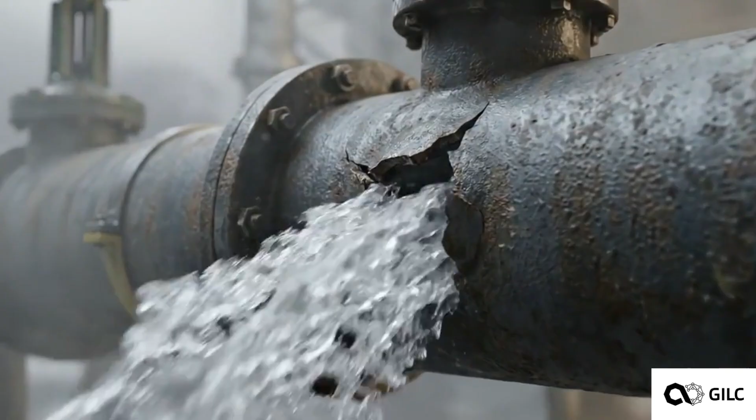We are frequently told the energy transition requires building massive new power plants. But look at the grid we already operate. The global civil infrastructure network is bleeding kinetic energy.

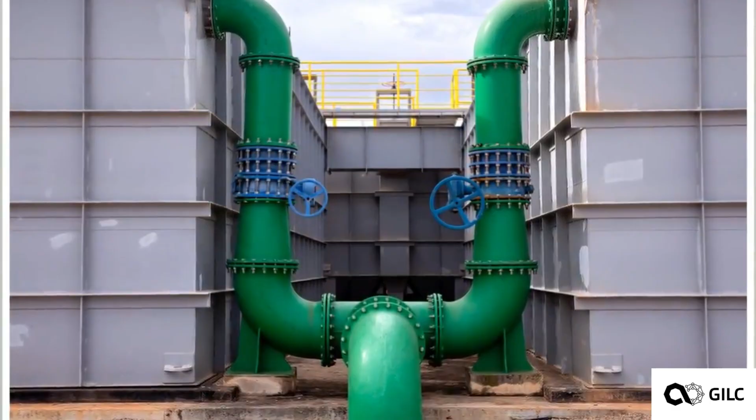Consider municipal water mains. Every day, millions of gallons are pumped through these networks. To prevent pipe bursts at your faucet, heavy industrial valves artificially drop the water pressure. That pressure drop is uncaptured mechanical energy.

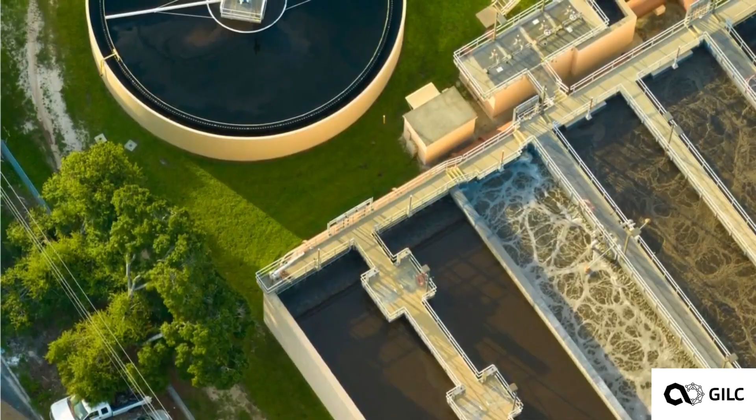The same mechanical waste happens in wastewater treatment. These massive facilities run continuous, unoptimized aeration cycles 24 hours a day, burning electricity to keep fluid in motion without recovering any of that momentum.

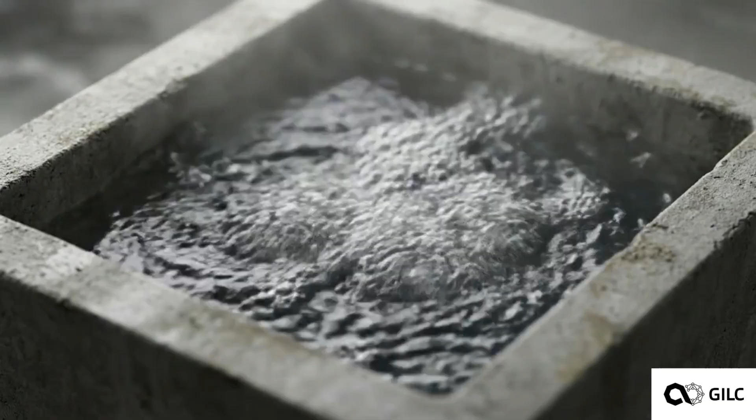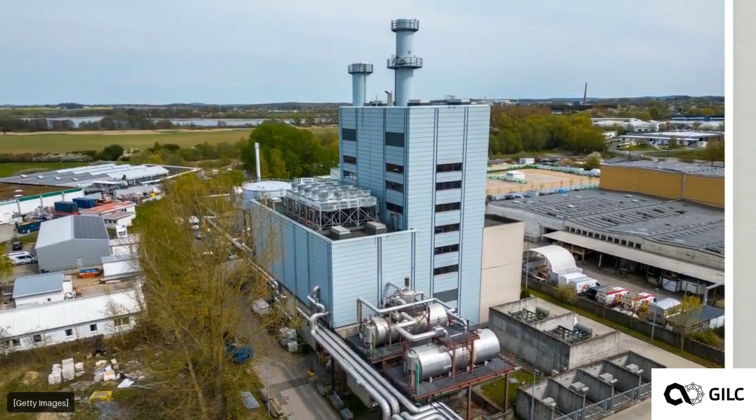District heating networks operate on similar inefficiencies. Main circulation pumps force hot water across entire cities, yet their mechanical loads remain untracked and unoptimized. Municipal utilities treat these systems as static energy consumers, but the physics dictate otherwise. These networks are active kinetic reserves.

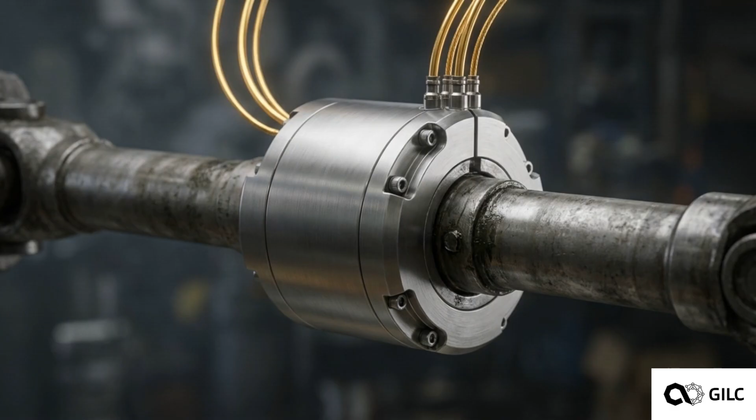Rather than constructing a new utility from scratch, we can deploy an energy recovery infrastructure layer, a physical network that intercepts rotating machinery and captures the wasted mechanical force directly at the source. The next phase of public infrastructure relies on capturing this invisible waste. It converts constant operating liabilities directly into generating assets.

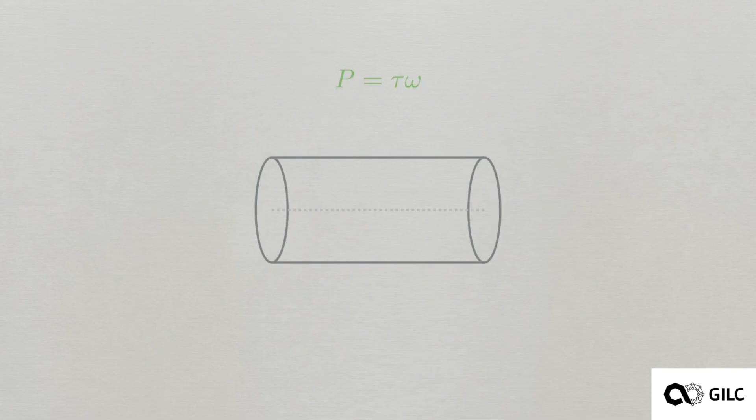Energy recovery follows a strict equation: power equals torque times angular velocity. To capture this, rotational force is channeled into a radial flux permanent magnet generator. Inside, spinning neodymium magnets convert torque into raw alternating current.

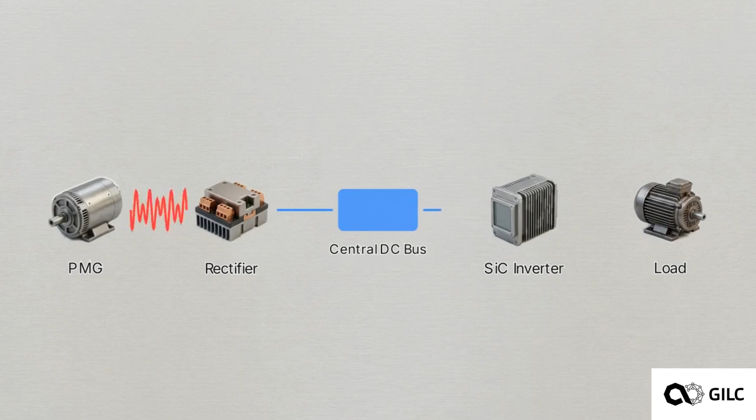But you cannot feed raw, unregulated alternating current back into an industrial facility. This strict power electronic stack conditions the energy. Raw AC exits the generator, enters a rectifier, and feeds a central DC bus. From there, it passes through a silicon carbide inverter, minimizing thermal losses and maintaining system efficiency above 95%.

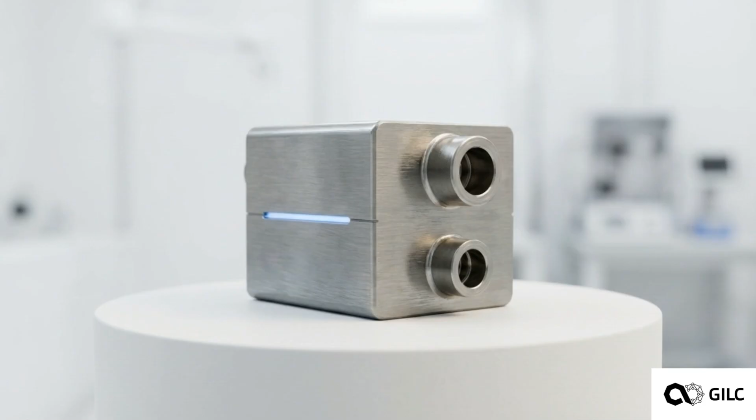Proving these physics in an isolated environment is straightforward. Deploying the technology across a global grid requires mass production. Bespoke, custom-built generators cannot meet that scale.

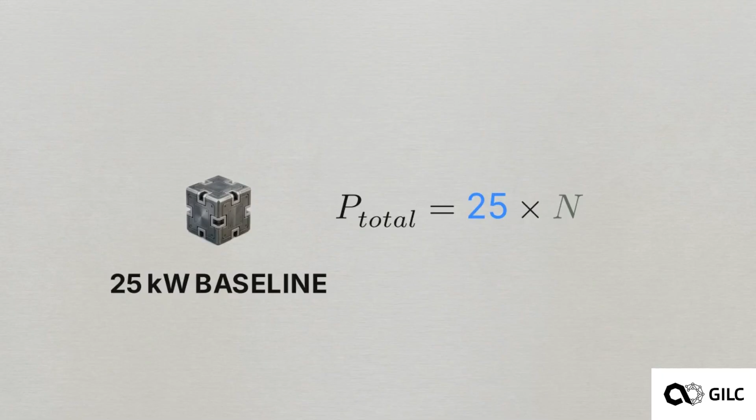Hardware must be standardized. This 25 kilowatt flux block is the interchangeable baseline unit. Every deployment follows a rigid rule: total power equals 25 times N. These modules stack, scaling from a 25 kilowatt micronode to a 2 megawatt industrial array.

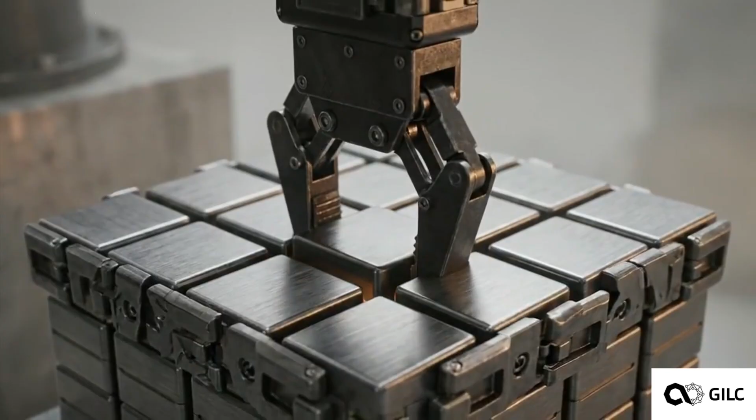Using a single standardized block eliminates custom engineering on site. It collapses inventory complexity and removes friction from the supply chain. By locking the physics of energy conversion into plug-and-play modules, the recovery infrastructure transitions into scalable industrial hardware.

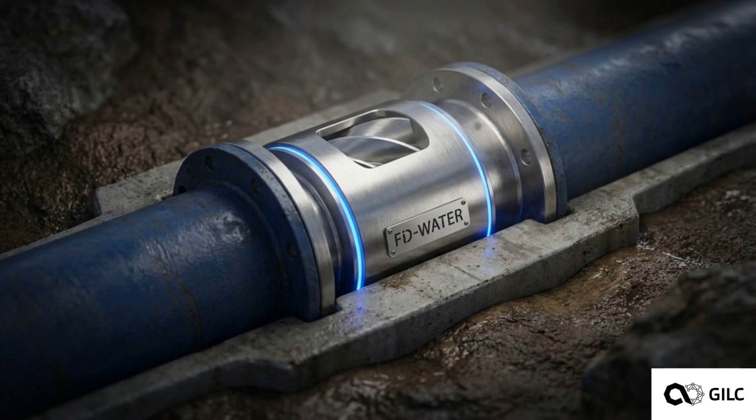This modular framework is currently deployed in Sofia, Bulgaria. The city serves as phase 1 of a national program, acting as the primary proving ground for civil infrastructure integration. The initial deployment installs FD water nodes directly into the municipal water mains.

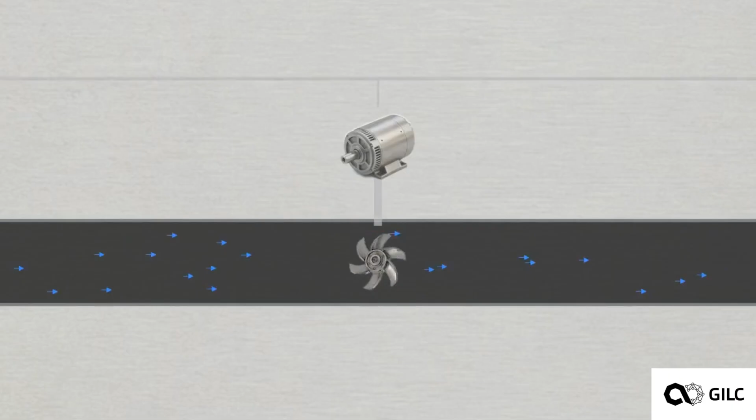This visual demonstrates the fluid dynamics of an inline turbine. As standard pressure drops of 1 to 5 bar pass through the system, the node captures the kinetic flow. Each integrated cluster is engineered to generate 100 to 500 kilowatts of continuous power.

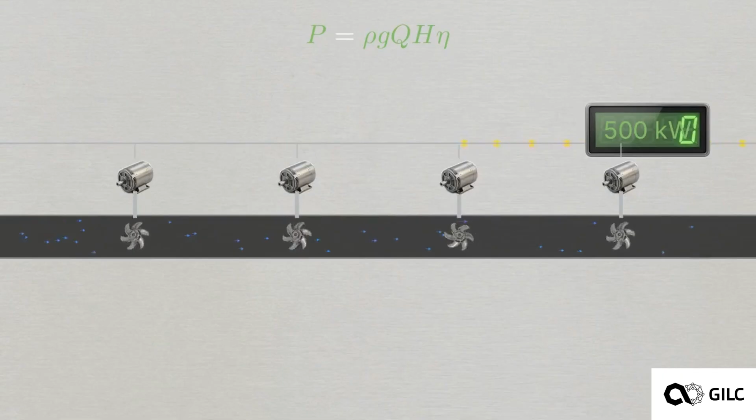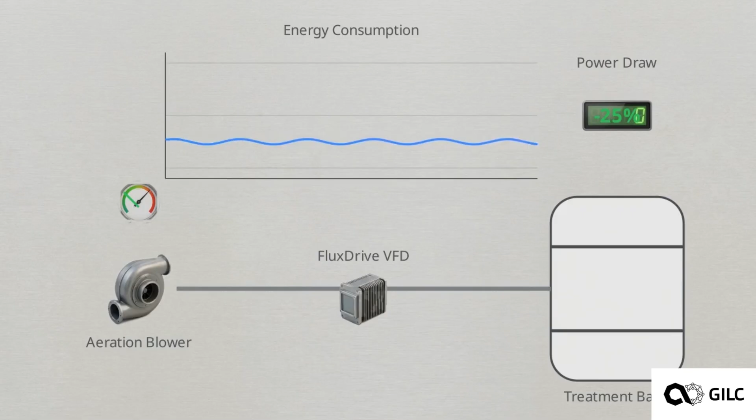The second deployment site is the Kubratovo Wastewater Treatment Plant. By retrofitting the aeration blowers and sludge pumps with variable frequency drives and advanced controls, the facility's overall energy consumption drops by 25%. The third site connects to Toplofikacia Sofia, the local district heating authority.

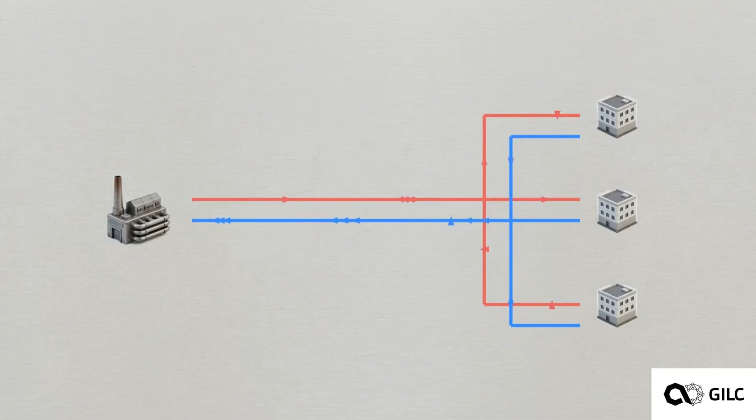Upgrading the main circulation pumps and local substations reduces the network's electrical load by 10 to 20%. For any municipal operator, the primary barrier to these upgrades is facility downtime. Shutting off a city's water supply to install a generator is not an option.

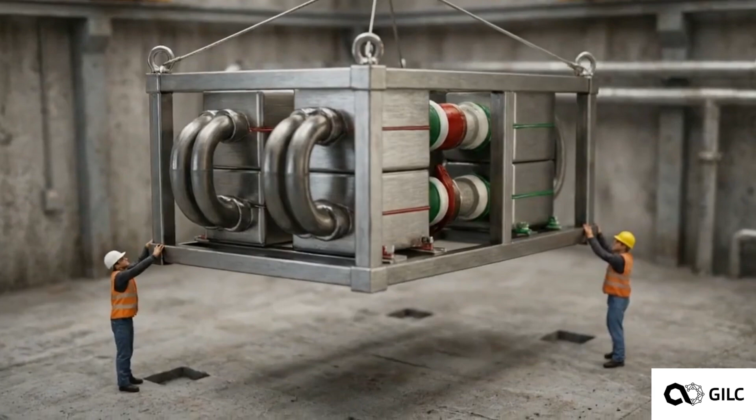Because the hardware arrives on standardized, pre-assembled skids, mechanical mounting and electrical integration are highly predictable. Installation requires under 48 hours of facility downtime. You do not need to halt a living city to upgrade its infrastructure. You simply plug into the existing flow.

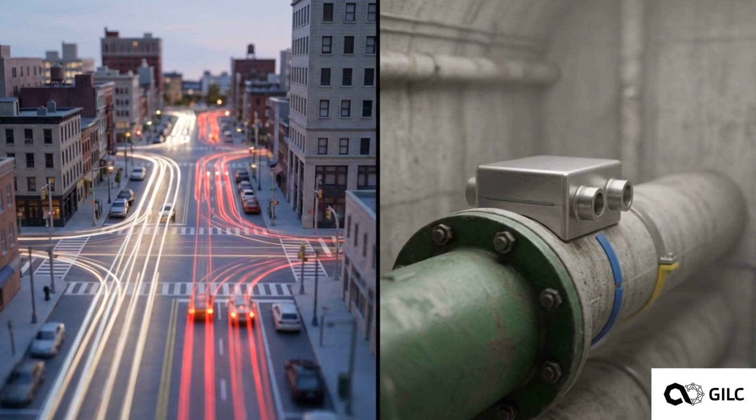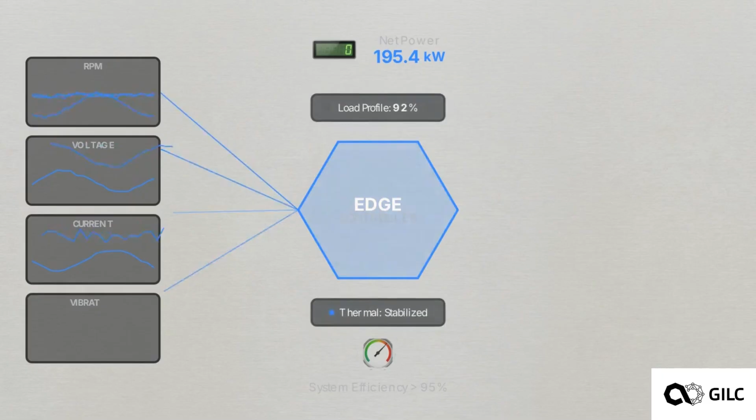Yet, physical hardware alone cannot adapt to the daily, fluctuating demands of a massive urban grid. To maintain stability, the network is managed by a central intelligence layer, the Data Monitoring and Intelligence System. The edge controller continuously ingests high-frequency telemetry, RPM, voltage, current, and vibration at 10 kHz.

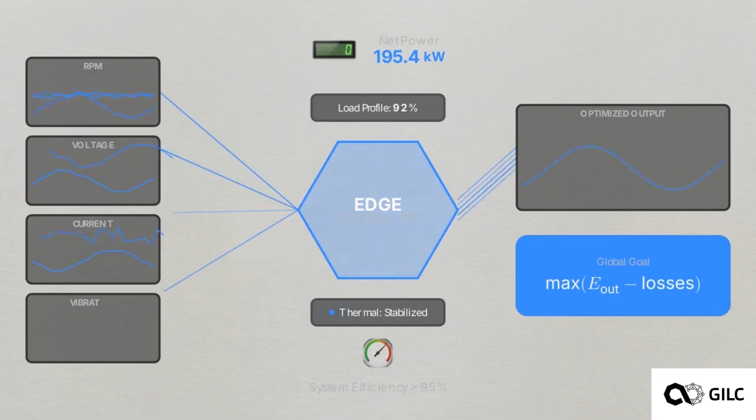The software runs an algorithmic loop, dynamically adjusting load profiles and thermal constraints to satisfy a single mathematical objective: maximize net energy output minus system losses. The software layer transforms passive metal components into an intelligent, self-optimizing grid asset.

The rollout strategy relies on strict validation. Expansion beyond the city limits is locked until the Sofia pilots mathematically prove a clean 5-year capital payback. Once that financial threshold is crossed, it acts as a scale trigger.

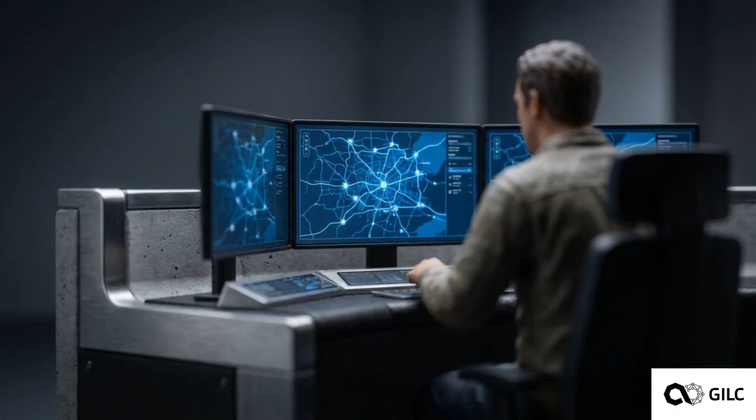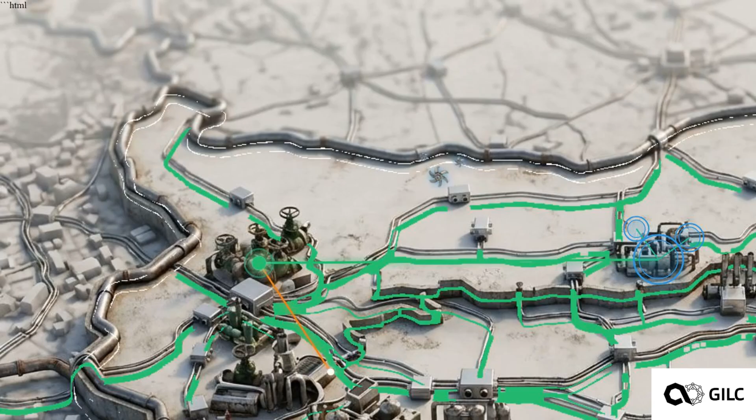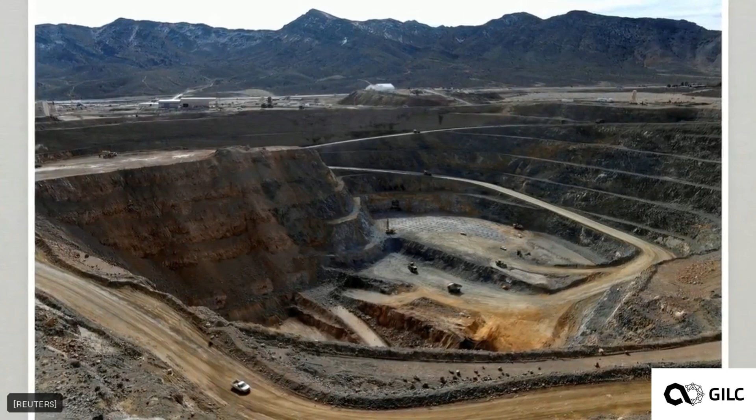Metallurgy and cement manufacturing follow closely. These are punishing thermal and mechanical environments that require robust, standardized motor optimization to survive. Finally, the rollout reaches Phase 4, establishing a fully integrated, countrywide energy recovery grid.

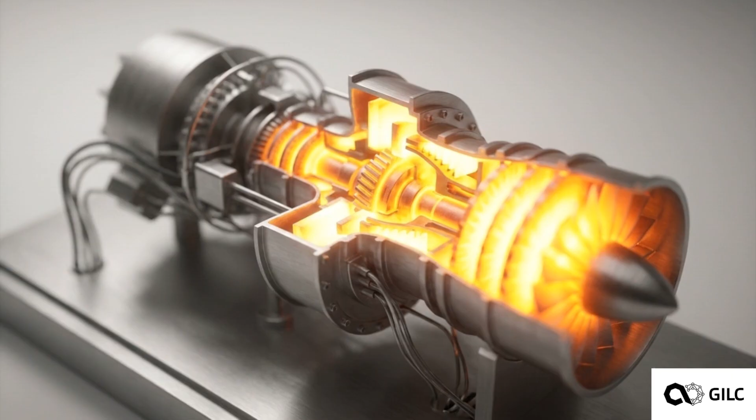This scaling trajectory is strictly deterministic. It is unlocked exclusively by verified thermodynamic output and hard financial returns.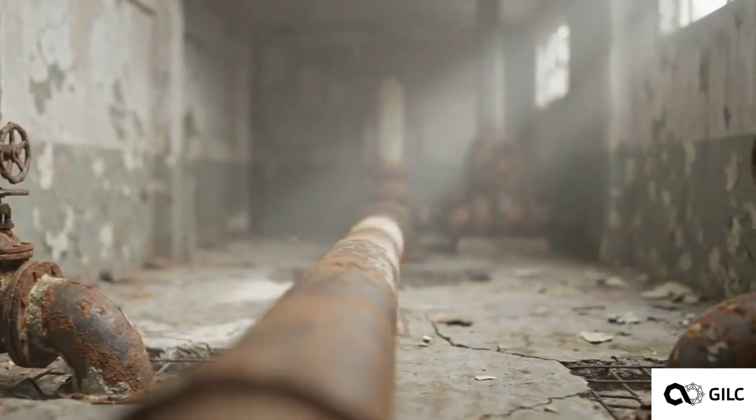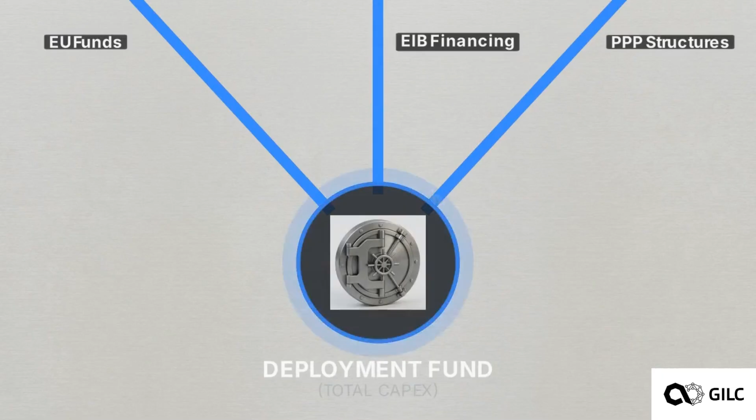Instead of relying on municipal budgets, the installations are backed by a multi-source deployment fund. Capital is drawn from specific high-tier institutional streams, namely European Union cohesion funds and Green Deal grants. This is reinforced by targeted debt financing deployed by institutions like the European Investment Bank.

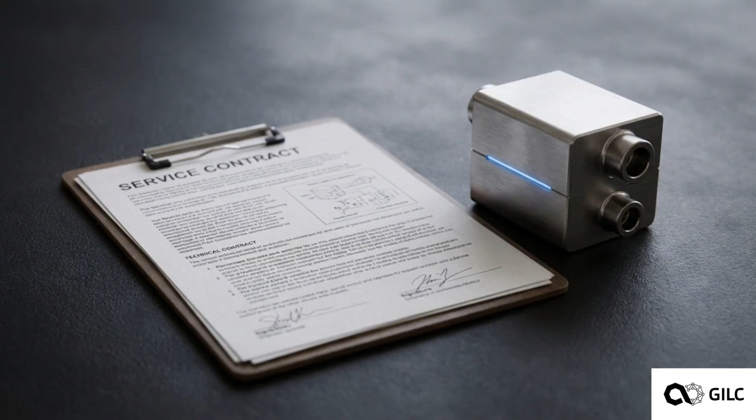The cycle runs on an energy-as-a-service model. The capital injection funds the upfront installation. The system captures wasted energy, and the financial savings strictly pay down the initial cost.

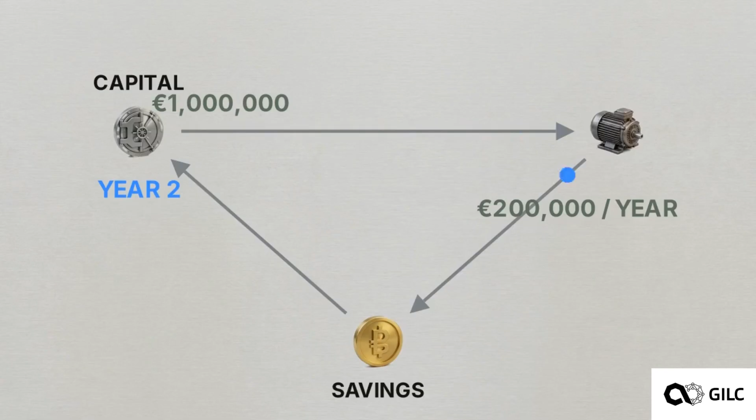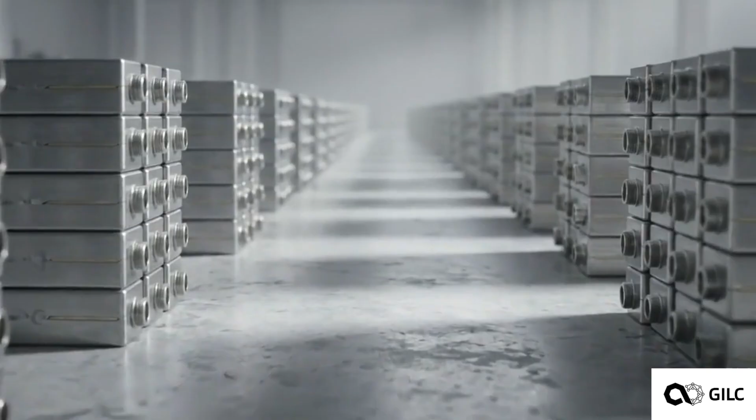The math is rigid. A €1 million installation generates €200,000 in annual savings. That locks in a highly predictable 5-year payback mechanism. FluxDrive is a verifiable engineered asset class. It absorbs institutional capital and utilizes basic physics to generate predictable, scalable infrastructure yields.